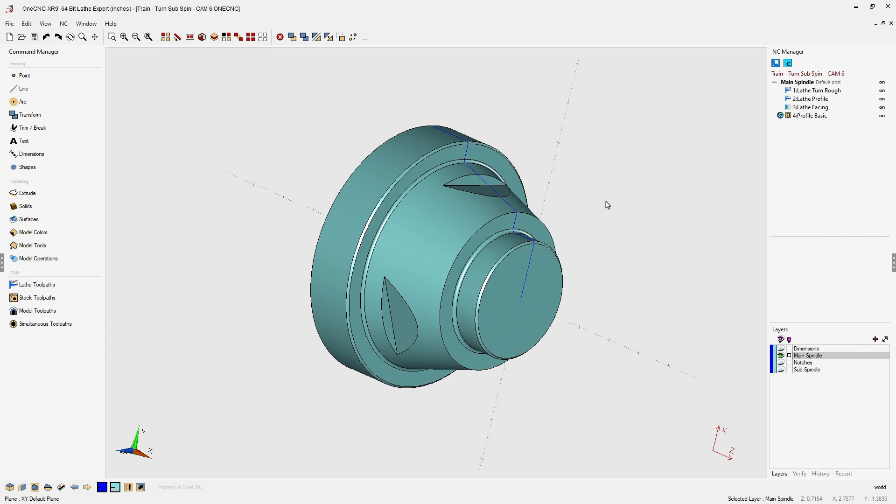Hello, this is Patrick at One CNC West, and what we're going to do in this training video is take a look at custom code. Now, custom code is a very powerful feature provided within all One CNC CAD/CAM systems.

So what is custom code? Well, it's the ability to insert CNC code anywhere within your CNC program. In fact, as you're building your machining operations over here within the NC Manager, you can insert your custom code any place that you'd like.

Now, you may be asking yourself, why are we taking a look at custom code for a lathe project that incorporates subspindle and main spindle? Well, it just so happens that an application like subspindle and main spindle is a perfect opportunity to use custom code. Now, there's two different ways to use custom code. Let's first take a look at the very fundamental, easiest way to use it.

Let's head over to the Command Manager and select our stock toolpaths. From within stock toolpaths, at the very bottom, select custom code. Now, by default, you're going to see there's two different columns. There's a pre-made customs column and a custom column. Let's ignore pre-made customs for right now, and let's simply just type in some CNC code that we would like output within the program. I'm going to type in M01.

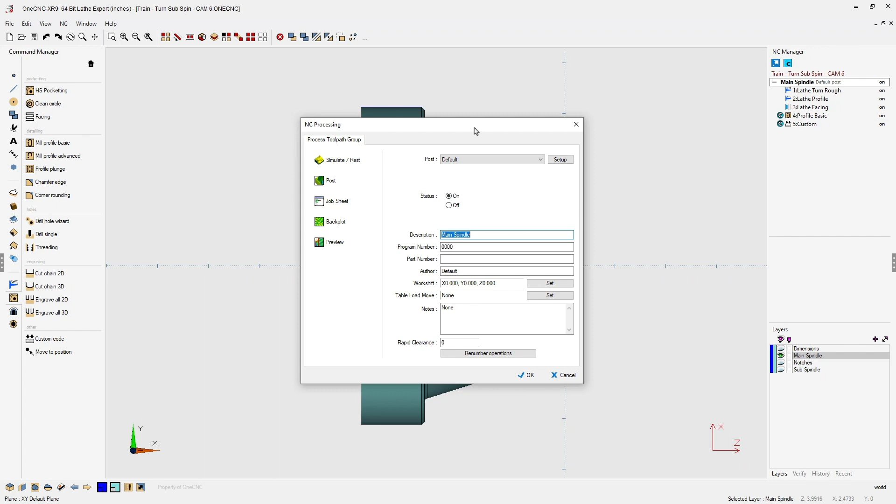With that done, I'm going to click Insert, and notice within the NC Manager, there's a new command here called Custom. So if I were to generate CNC code now, let's right-hand mouse click on the toolpath group, select Post Group. I'm just going to be using the default post processor. We'll select Post. I'll just use the default name. We'll click Save. And if we look at the very bottom of the CNC program, you're going to see the M01 that we defined within our custom code.

Very nice. So that's the most fundamental way to use custom code, is to simply head over into the Command Manager, select Stock Toolpaths, Custom Code, and type in whatever you'd like. I might want to type in something different, maybe a comment like coolant off, and then click Insert, and that's going to be output right here.

All right, now the second way to use custom code, and I think this is the most common way to use it, is to create custom code and then save it so that you can use it anytime that you'd like in the future. Let me show you how to do that. Let's head back over into custom code. And I'm going to delete what I typed in earlier. And let's select the New button. This means that we want to create custom code that we want to save so we can use anytime that we'd like in the future.

I'm going to select New. And for the name of the new custom code, I'm going to type in Part Transfer Approach. Now, just like we did previously, we can type in the CNC code here. I happen to have some CNC code copied to the clipboard, so I'm going to right-hand click and select Paste. Now, I don't need all of this code, so I'm going to highlight the very end of that, hit the Delete key on the keyboard.

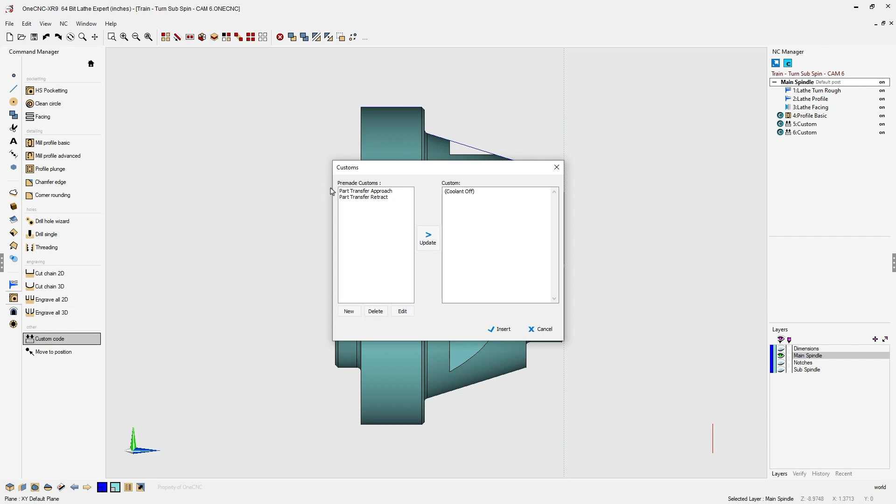To do that, head over to the Command Manager, go into your stock toolpaths, select Custom Code, and then select whatever you'd like. I'm going to select the Part Transfer Approach. Just left-click that until you see the CNC code. Once you see the code, you can click Insert, and notice now, instead of it just saying Custom, it gives us the name, Part Transfer Approach.

Let's do that one more time. Let's go back into Custom Code. This time we're going to use the Part Transfer Retract. Remember to left-click that until you see the CNC code. Click Insert, and there you go. Now, because these are considered machining operations, you can really move these anywhere that you'd like. It's going to give you a lot more flexibility. And of course, you can rename them as well.

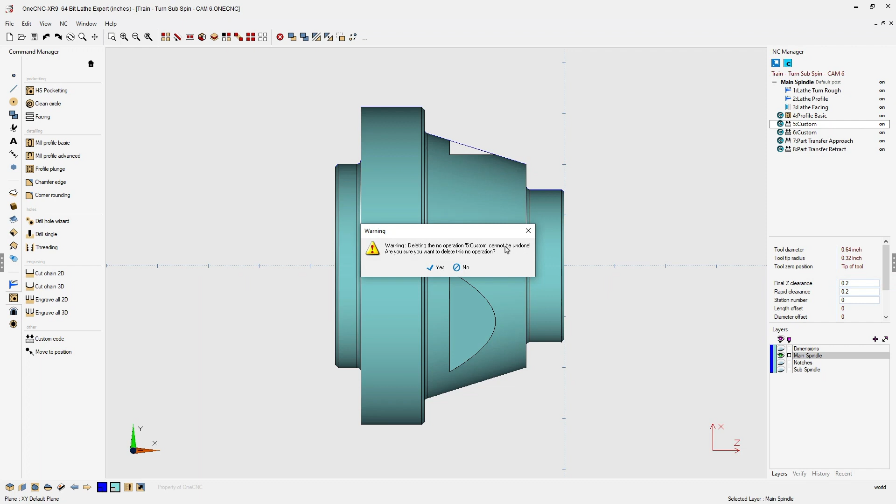Let's delete our first two custom codes that we created earlier. I'm going to highlight and select Delete Operation. Let's do the same on this custom code. Delete Operation. Yes, that looks great. Let's generate our CNC program now. I'm going to right-hand mouse click and select Post Group.

As mentioned before, custom code is post-processor independent. You can use any post-processor that you'd like. For example, I may change this to the Haas post-processor, and when I click Post, OneCNC is still going to generate that same custom code. So if we scroll down to the very end of the CNC program, you can see here's our Part Transfer Approach code, and here's our Part Transfer Retract code.

Now you're going to notice within the custom code, OneCNC output those question marks. That's fine, and you can definitely type in their values here if you'd like, but I want to show you that you can actually type in the values of these variables when using your custom code command. Let's do that. Let's exit out of the text editor, and we're going to delete our two custom code commands. Right-click, Delete Operation, right-click, Delete Operation.

All right, let's execute our custom code. Head over to the Command Manager, Custom Code, and let's start with our Part Transfer Approach. I'm going to left-click until I see the CNC code. Now, I can type in information here, and it will be output within the CNC program, yet it won't affect the hard copy of the custom code, which means we can type in a value.

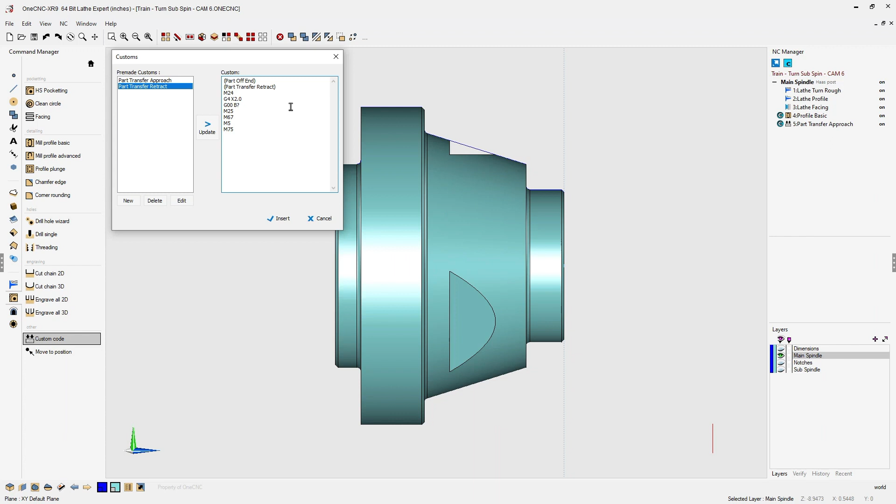Let's do the same for Part Transfer Retract. I'm going to left-click until I see the code, and here for B, let's type in a different value. How about 5? That looks great. We'll click Insert, and now let's generate the CNC code for this. I'm going to right-click on the toolpath group, select Post Group.

Again, this is post-processor independent. Just as a different example, why don't we use the Mori Seiki CY axis? Post. I'll use the same CNC program name. We'll scroll down to the very bottom, and now we have our custom code, and you're going to see now that the values have been output here. Custom code is a very powerful command and provided within all OneCNC CAD/CAM systems.